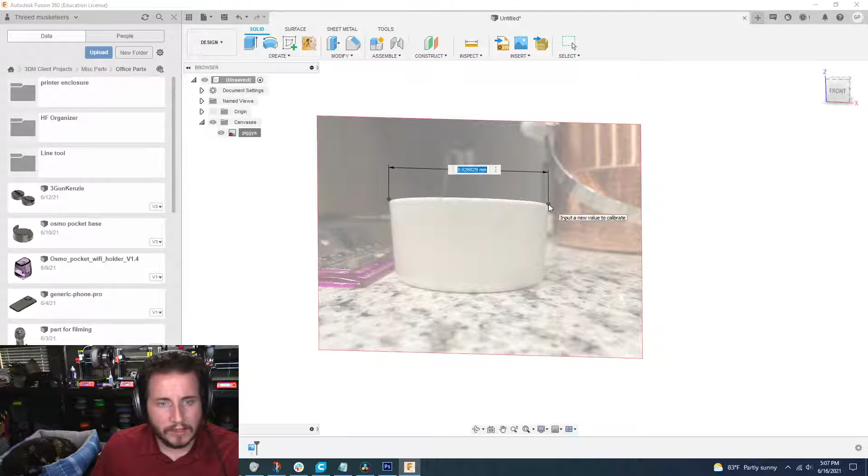We want to work from the front. That's fine, because what we're going to do is get it to the right size. So our canvas, we're going to calibrate the canvas because from this edge to this edge needs to be 3 inches. That's going to make the canvas quite a bit larger. Look on the front so we have it. Why does it feel like that's backwards? Because in the photo it looks like that. Whatever, it brings it in weirdly. But yeah, it's 3 inches across and it's 1 1/4 inches tall.

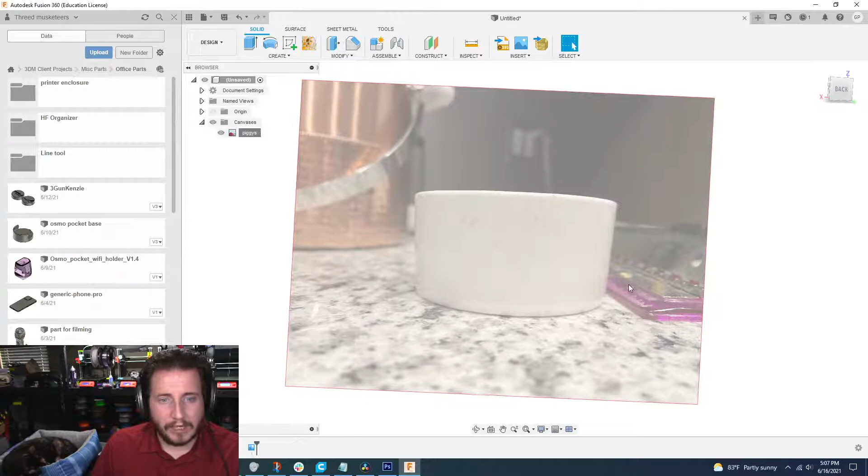So I'm going to also recalibrate it over that, so we know from here to here it is 1.25 inches. There we go.

Alright, so let's take a look at things here. We've got our sizing set. Now we just need to get it traced out, so let's go ahead and get this thing traced out. We're going to grab a... as we do this, we're going to grab a line tool.

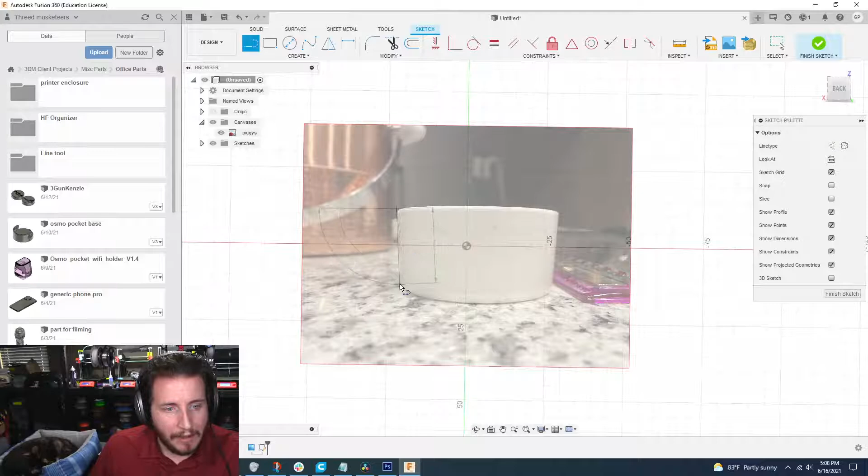We really only need to come to the middle, which that is not the middle, but it shouldn't matter because I can just do some measurements. So L X, we're going to do a line going straight up, and then as we do, we're going to do another one going straight out, and that's L and X to do it. X again to remove the construction.

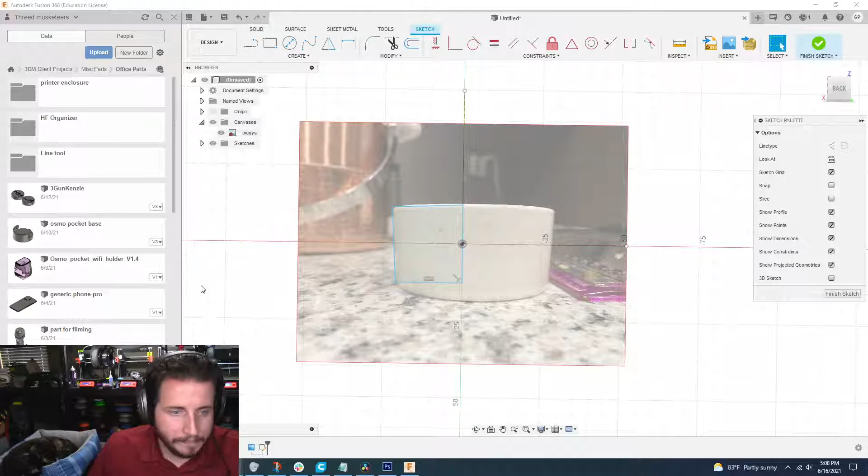Sorry, I'm off my game today, because I got a message that I really didn't expect to come in. It's just 3 inches wide, but it's 3 inches wide at the top, so let's kill that. This needs to be flat, so we'll just make it dead flat with the horizontal vertical command.

We're going to hit a dimension. This needs to be 1.5 inches wide, and it's going to make it a lot bigger. So we're going to make this collinear, which is this button up here. Collinear goes here and there.

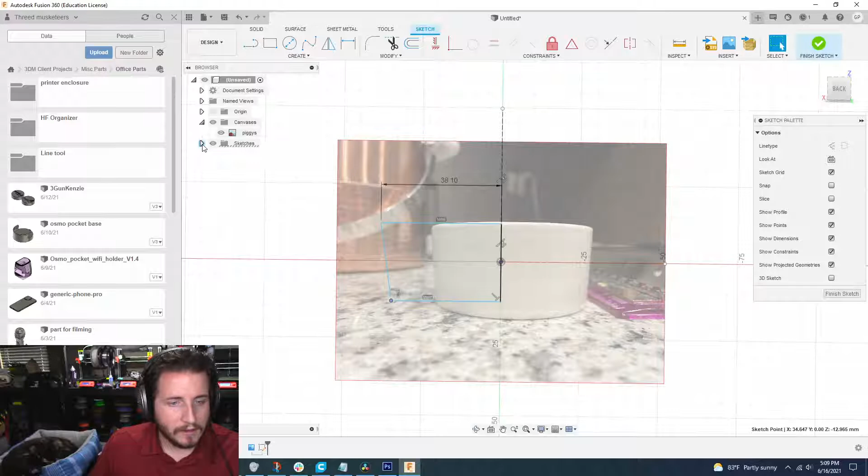We want the bottom. I need to reposition this canvas so it's kind of in the middle. Can we reposition it? Edit? It's not going to let us edit it? Okay, cool.

This photo was not taken dead on straight, so it does make it a little complicated for me, but I'm making it work.

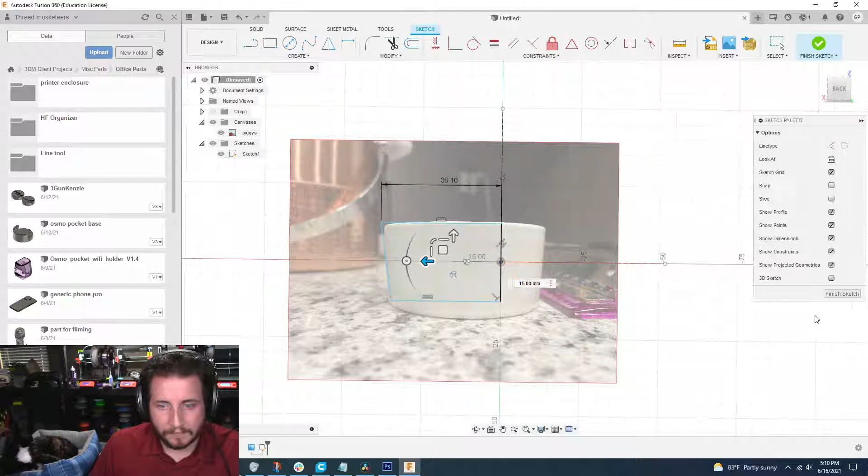Alright, so we know it's 3 inches wide, right? And we can take some guesstimates here about the angles. So let me hide the sketch real quick. Actually, no, let's leave that sketch up. I'm going to leave that where it is. No, let's move this back. I want to edit the canvas. I want to bring it as close to the middle as I can. That's about the middle. Yeah.

Okay, so why... yeah, 1.5 inches is 3 inches on the width. I wonder if she gave me the right number. Oh well, let's hope we did.

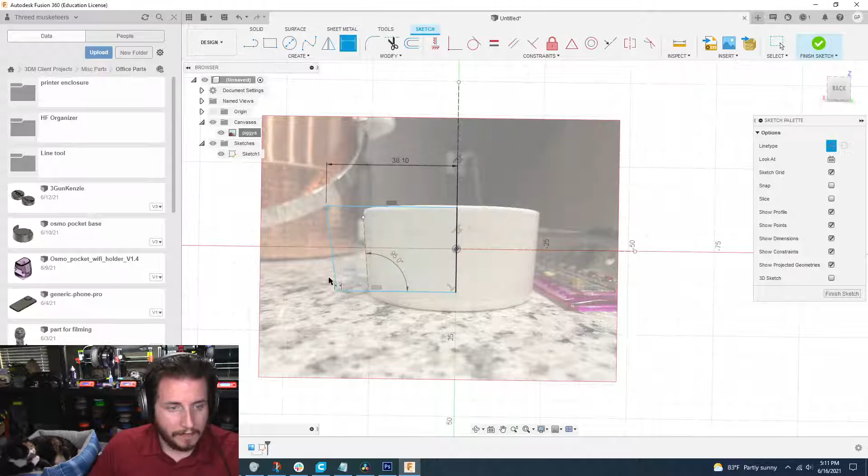Alright, so we can do some line work here. L and X so it won't bother anything. Come down to there. Oh, I guess that'll work. So I can go dimension here to here. It's a 94, probably do 95. 95 degrees, so that means this to this needs to be the same as that.

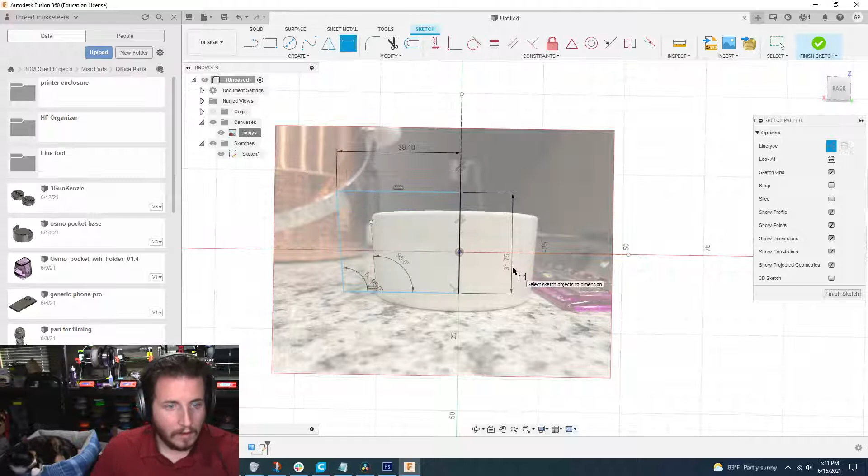We know that the thing is 1.25 inches tall, so we can dimension this here. That should give us kind of our look. Unfortunately, it's not vertically where we need it. There we go. Alright, so I'm going to dimension this from this bottom line here.

0.1 degrees? How is that off? I need these to be... interesting. Even though we've given it a perfectly level command, it's not.

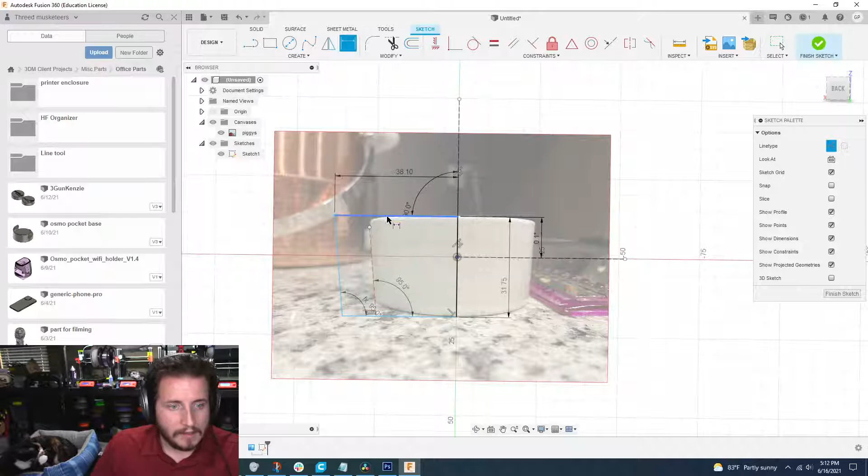So let's kill that. Let's get the dimension tool. Going to go to here. It's 90 degrees, which is exactly what we want. We want to figure out how far we are from here. Yeah, whatever, it's not going to give us the number that I'm looking for, but it is what it is.

Alright, well that's fine, what we're doing is not incredibly important for that piece anymore. We're going to go ahead and grab the Revolve tool. We're going to grab that profile. We have our center axis. We have it revolved. Now, visually, that's the bowl.

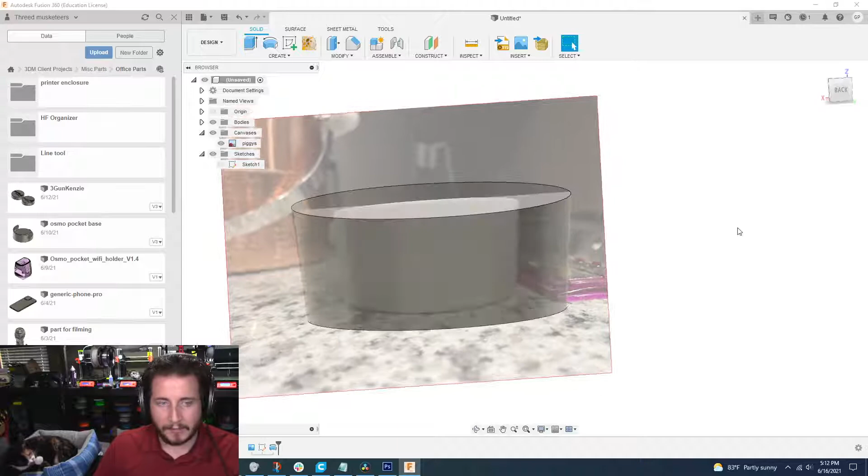Now, of course, with perspective, the bowl's going to be a little bit crazy, but that's why we get sizing, so we can go ahead and get rid of that now. What we're trying to do here is actually build something to keep the guinea pigs from knocking over the bowls, so we want to create a thing for it to sit into.

Whoop, drop something. God knows what that was. The cat will probably find it later on and let me know.

So we've got to make some more sketches. We're going to go back in actually to that first sketch, and we want to grab an arc. Probably a 3-point arc would be fine. Grab it from here.

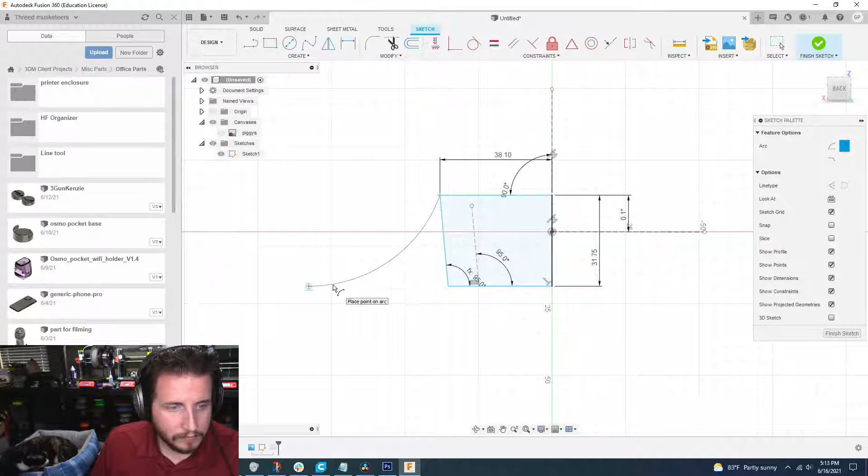Maybe down to there. Just like that, we're going to grab another line, go down to there. That is probably way excessive, but that is okay. We are going to revolve this around that. And we are not going to join, we're going to do a new body. So we have basically two separate bodies at the end of this.

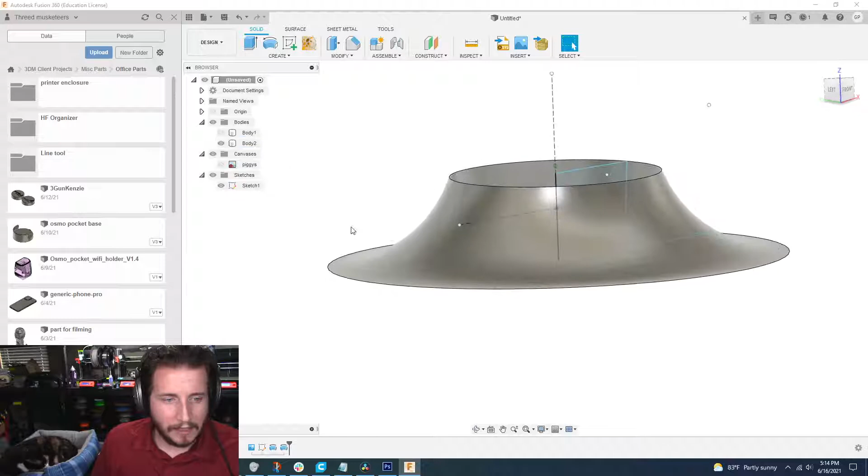So when we look at our bodies, we have our body 2 and our body 1. We're going to get rid of body 1 because it's not that big of a deal to us right now. We're going to use the press pull tool.

We're going to bring this edge in some. Can we go negative 0.5? Or are you not going to let me do that? You're not going to let me do that, because I'm guessing this comes all the way to basically a point. So let's look at just filleting this edge, see what that does.

Alright, so we've got an issue with our design. Our design comes to way too much of a point. So we're going to get rid of this, get rid of that, and look at rebuilding it.

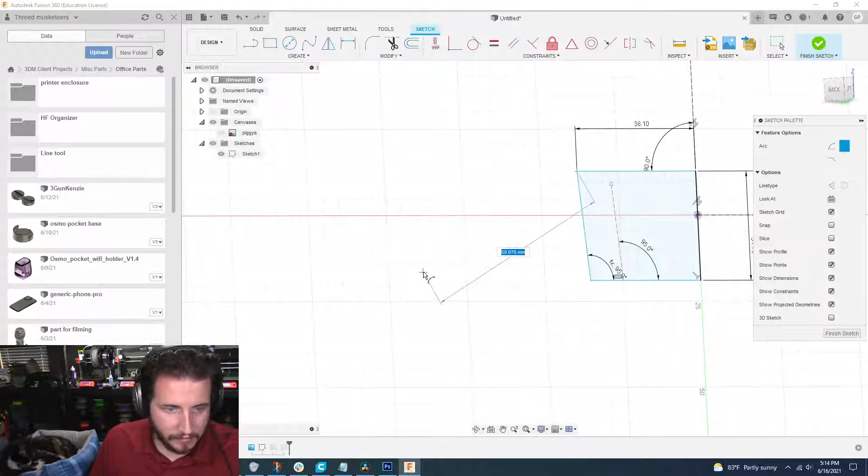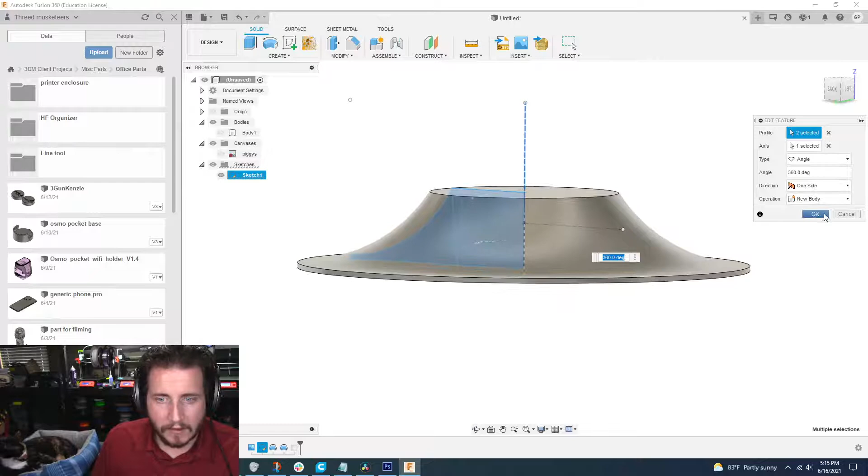So again, we're going to create an arc, a 3-point arc, and come down to, I don't know, there. Now we're going to do a line coming off this edge to there, to there. All right, now that's much better because now we can come in and press pull this edge to whatever kind of exterior diameter that feels good, right? This is more of a... oh, I see what happened here. There we go. New body, beautiful.

We can turn off the sketch.

And again, for those that are just joining, we are building a rim for a bowl for guinea pigs, to keep them from knocking over their bowls.

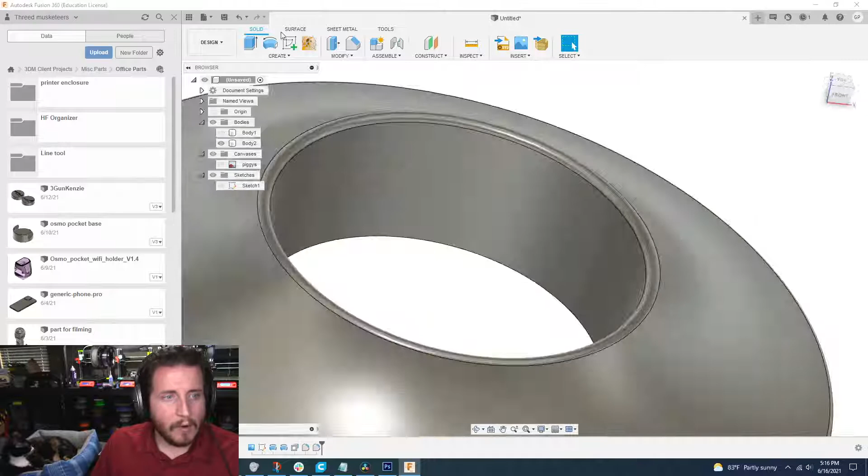What we're also going to do is come in here, not extrude, we're going to press pull this edge. We're going to go negative 0.25. That's going to give it some room so it can go in there. It's going to wiggle around a little bit, but this is going to make it a little bit easier because of food safety.

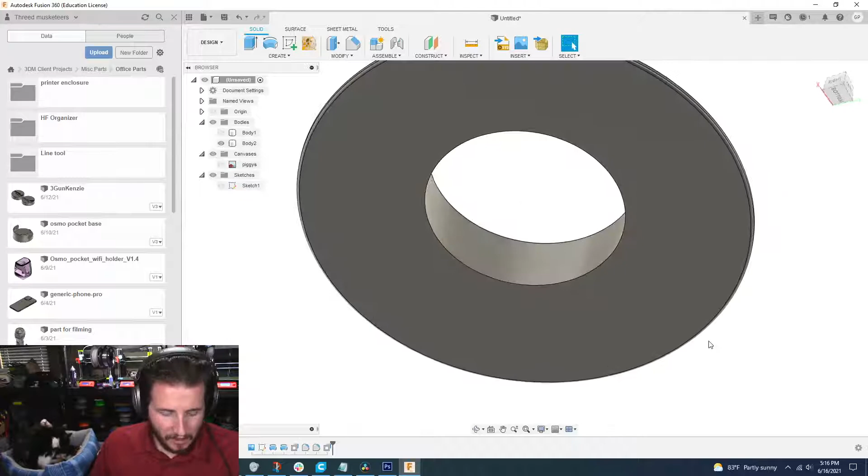So let's talk about food safety for a minute. Food safety is a big issue with 3D printing. People believe that you can just 3D print stuff that people can eat out of, that animals can eat out of, and it's perfectly fine. The answer is it's not. 3D printing under no circumstances, at least FDM, is not food safe, period.

And if you disagree with me, prove it. To have a food safe printer, you must have a machine that is all NSF certified. The material must be food safe, and PLA is generally food safe. But it must only print food safe stuff, and that is it. It cannot do anything other than food safe, because FDM material is inherently not very food safe in general. It has micro cracks and fissures and things that make it just a little bit problematic. And yeah, just don't eat out of it.

Don't, like, this is for a food bowl. It can be cleaned, it's no big deal. The piggies are not going to eat off of it, so you don't have too much to worry about there. But because this is going to be relatively cheap to produce, I'm not too worried.

And I'm looking, seeing the radius is 81 millimeters. That is way too big. We're going to bring that in with the press pull tool in some here.

That's probably fine. So the goal is to let them walk up without getting too messed up on it.

Let's grab this fillet that's right here and look at adjusting it. I think it's that first fillet. It is. Let's go to a 2 millimeter fillet. Meet in the middle, 1.5.

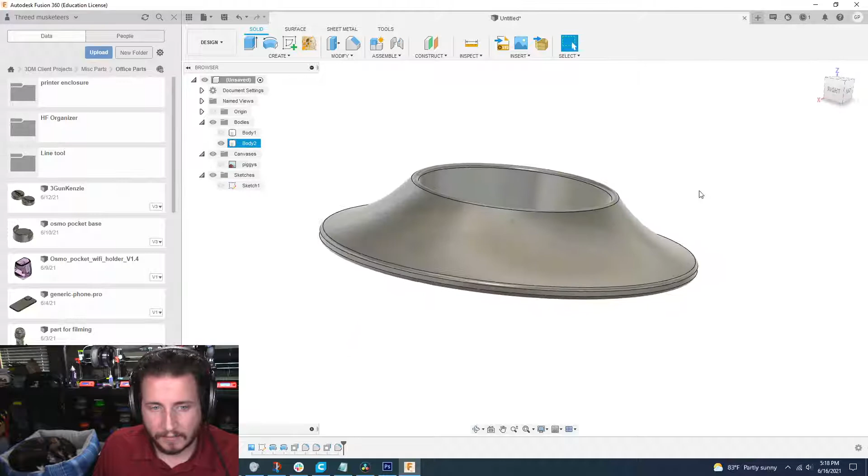Grant's going to have to do some hardcore designing tonight, unless one of our designers can take over, because we've got a client that needs parts, and I got to get them done. Part of owning a business is that when you don't... somebody's calling the business line. I'm sorry.

Give me just a second to let go of that. I thought that I turned off Google Chrome for noise. Oh, I can't because the music would turn off. Right, I gotta wait for them to stop calling the business line.

La la la la la. Waiting for people to stop calling the business line.

Okay, we're good. But yeah, part of the fun thing about being a business owner is if your staff are not W-2s, then they're 1099s. They just kind of get stuff done when they can, and then there are deadlines. And if deadlines are missed, guess who that falls upon? That falls upon me. Unfortunately, or fell upon me, that's the correct grammar.

And unfortunately, we didn't get the job done. So I'm going to learn tonight how to do it myself, and that means probably not a whole lot of sleep. I don't sleep much anyways, but I'll be working a lot later than normal. But hey, that's the way it goes. Part of the trials and tribulations of owning a business.

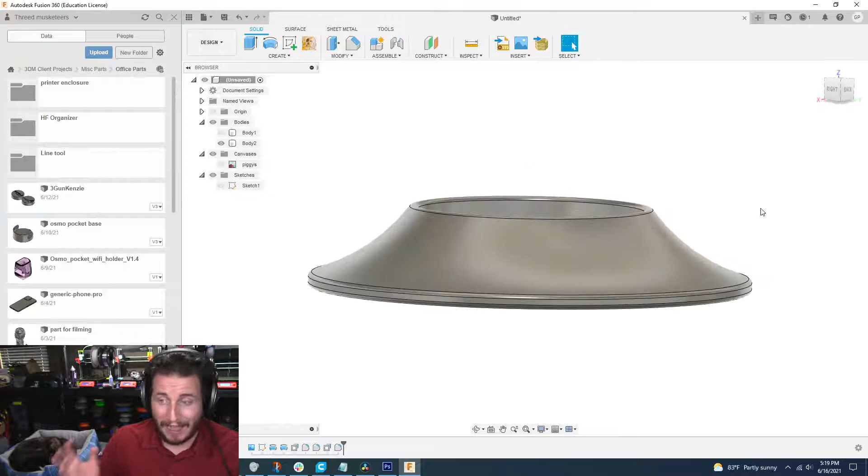I thought that it was in the works. I haven't heard from the designer, so my assumption is that it has not been updated, unfortunately. So we do what we got to do. As soon as this is over, I'm going to go work on a project for a client.

But anyways, I think it's really cool. This part is actually pretty simple, and we're almost done with it in less than a half hour.

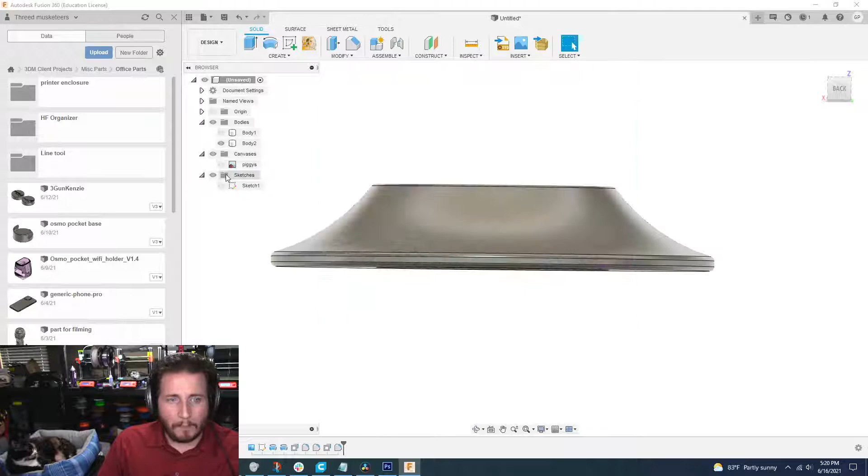Because this picture was not what I was expecting. Let's talk about it. So if you're going to design off a canvas, you need an image that is perfectly in line, because otherwise you deal with skewing. I had to take a guess as to what slope that is. The nice thing is, we're building this in such a way that it has a lot more slope than what it probably needs. So the bowl is going to fit in there, no big deal.

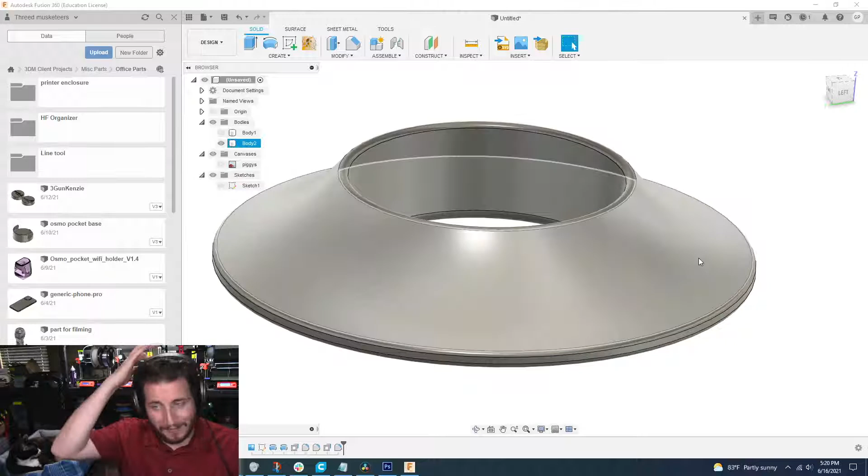They can use it as a slide if you make it bigger. They could use it as a slide. You know, that'd be funny if they did. If they do, and one of our team catches that, that'd be funny, and we'll put that on a YouTube thing. What do we call that now? The community tab? I don't like this song.

We're going to another song. The community tab. That's right, the community tab.

Boy, you are just tired, aren't you, Miss Victoria? Can I get a like for petting the cat on a live stream? I know, you just want to be left alone all the time. I know, you're just like your dad. Just want to be left alone all the time.

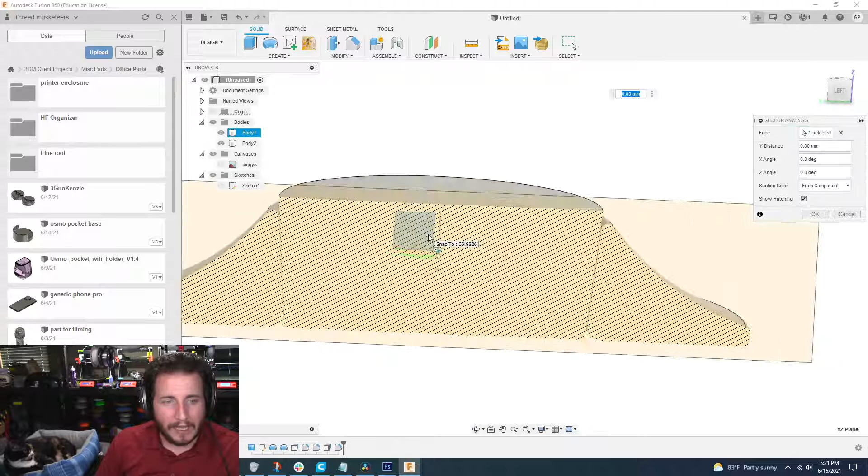Anyways, let's take a look at this a little bit further. So we have our regular body, and I want to see the interface. Now I can come down here and kind of see it, but it's a bit of a pain in the ass. So to do that, we're going to use the Inspect Section Analysis tool, and pull from one of the edges. We can now see that between here and there, we have a quarter millimeter. That should be enough, because that's half a millimeter all the way around. Should give us enough wiggle room to make things function the way that we'd want. And again, this isn't too obtrusive, right? It's not really going to get in the way.

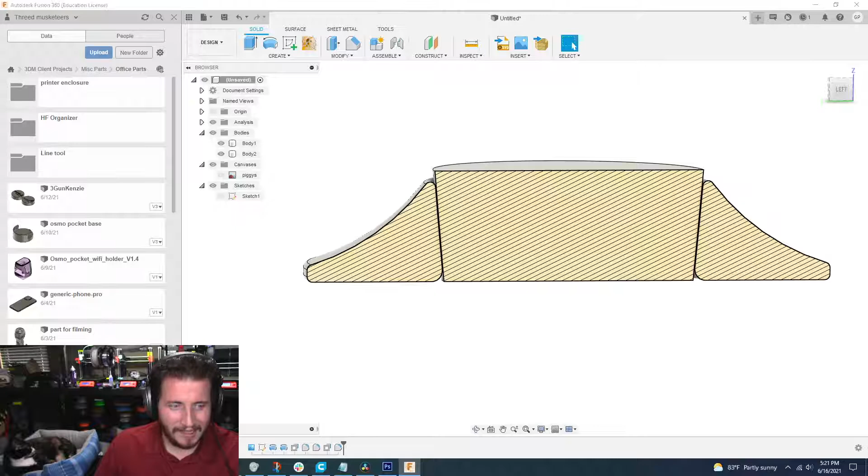And you know what, we'll go on Prusa Slicer too, and we'll show it inside Prusa Slicer. By the way, Prusa Slicer likely got a big update today. I haven't looked at Prusa Slicer today, but we know Prusa got a big update for their machines today, so it's likely, yep, configuration update. Cool, they got a carbon fiber PC blend for the Mini, but we are going to go to, definitely not that, we're going to go to the MK3S, and a little auto update as we're going.

Alright, so we've got this part. I'm thinking, though, that I want to make this a little—well, you don't want it too steep because then they're going to get stuck, right? And I don't want it too shallow in that they're not going to really be able to function. So this should allow them to move.

I should have asked—this is all about asking the right questions as well, and I should have asked the question from the front of their front paws to the front of their nose. That way they can eat, they can drink without having to crawl up on this. And all this really serves as is a way to keep the bowl from flipping over, because that's what this should do, right? We've brought the bowl now to 150 millimeters in diameter.

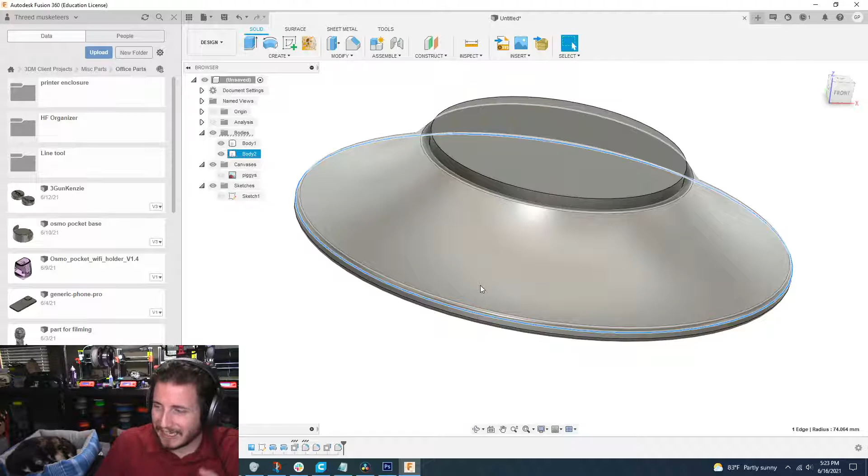So about 6 inches in diameter, and that's going to keep it from reasonably being knocked over. Again, for those just joining us, we are making a bowl that won't tip over for guinea pigs.

Now, I could make the bottom completely solid and actually turn this into a real bowl, but I think it's better if she uses the ceramic bowl she has and puts it in there, which will allow it to be hand cleaned. So as far as I'm concerned, this is the right way. Let me know in the comments what you guys think.

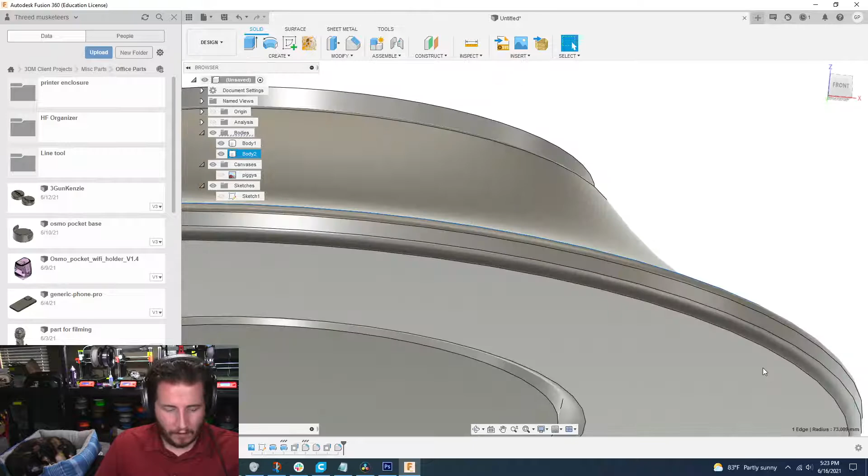We have a lip here. Let's see how tall the lip is. The lip's 5 millimeters tall. Allison's right, she says she thinks it's a trial and error situation. She's absolutely right, we gotta see what the pigs are willing to do versus what they're not willing to do.

This probably needs to come down to that. Let's see how that looks. So now that brings us to about 3.5, that's a little bit better. And yeah, this is where if you had the 3D printer, you could make this happen, right? This would be a lot easier if you had your own machine.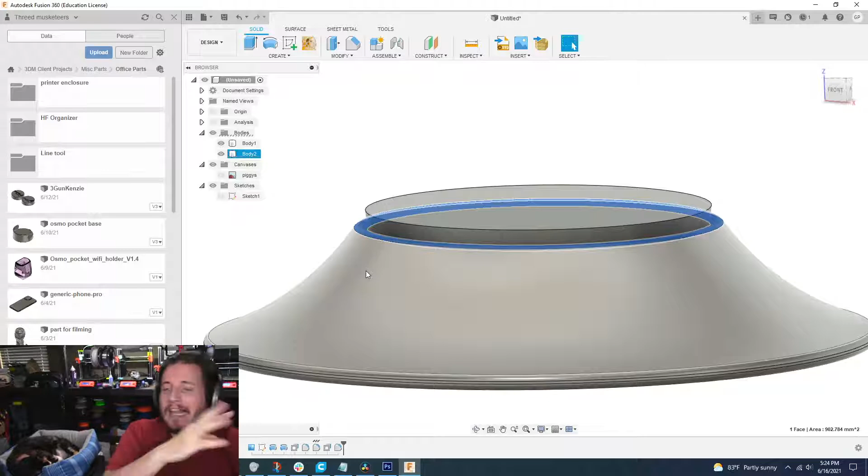And yeah, making things happen. So I've got fillets everywhere. I'm just trying to look to see where, because like most animals, they're going to find ways to hurt themselves if they can. I think I would probably not make it so high up on the bowl. My thought to make it high up is that I want to encompass at least 50% of the bowl so that when they hit it, it doesn't flop the whole thing over. I want enough of the bowl really being attached, but that is a good point.

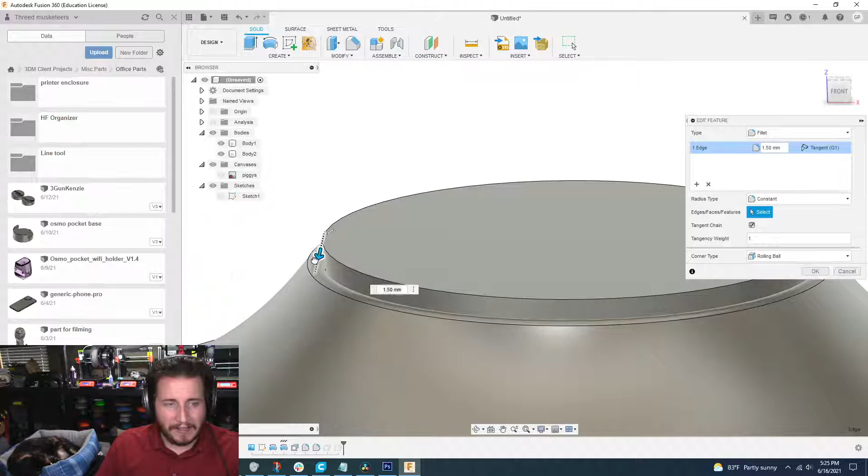So there are two different ways we can handle this. We can come back into the sketch and just modify where this starts and stops, or the way I'm going to do it, we can just modify this fillet. Because as we increase this fillet, it's going to bring it further and further down and only make this more and more round. Now, of course, we've got that little issue of if they're a little messy, you might get some buildup along this inside edge.

But is it a big deal? That's really what matters, is it a big deal? I don't think it is. I think this thing's going to have to get cleaned pretty often anyways, so I think that's more than adequate. Yeah, I think that's perfect, it works out kind of exactly what we needed. I figured this one was going to be short, but I didn't realize it was going to be this short.

So yeah, let's see here. I should ask—also, I gotta take a picture of this cat. Hi, Miss Kitty, we'll use that as our community post for everybody.

I need to ask the client, let's ask them what the names of the pigs are.

I guess you just have their feet on the floor, but they would have their feet higher with this design maybe, which I don't think is necessarily a bad idea.

And the reason for that—one of the kids I am watching at work with says hi. Hi kid at work, I don't know your name. How are you? I hope you're having a swell day.

You know, we're going to do the names of the pigs, and that one's going to be a fun one because I always struggle with putting names on curved surfaces.

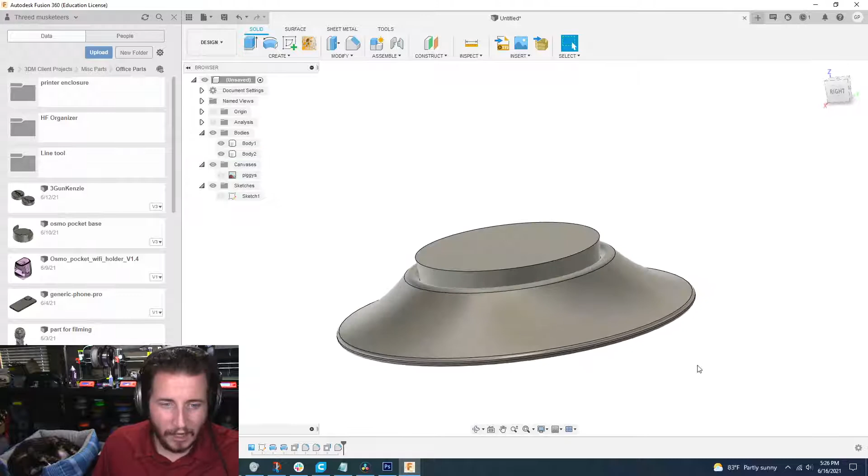Oh, you know what? No, we're not going to do this. I was going to do it, I was going to emboss the names here, but oh my god, it's going to get so dirty. So let's put it on the bottom.

So let's do a sketch right on the bottom there. We're going to project that.

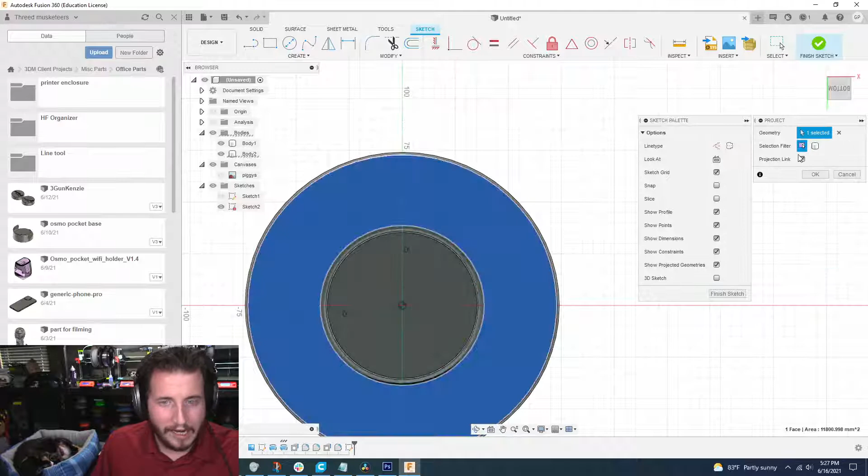And Prusa released a new printer today, the SL1S. I am so amped. As soon as we're done with this design, we're going to go take a look at it. We do have a video coming out tomorrow on it, but I'm amped and I want to talk about it on live with people to see what you guys think, because I think it's pretty cool.

So let's grab the text tool. I want text along a curved surface. There we go. And so we have the names of the piggies—they are Vinnie and Mozart.

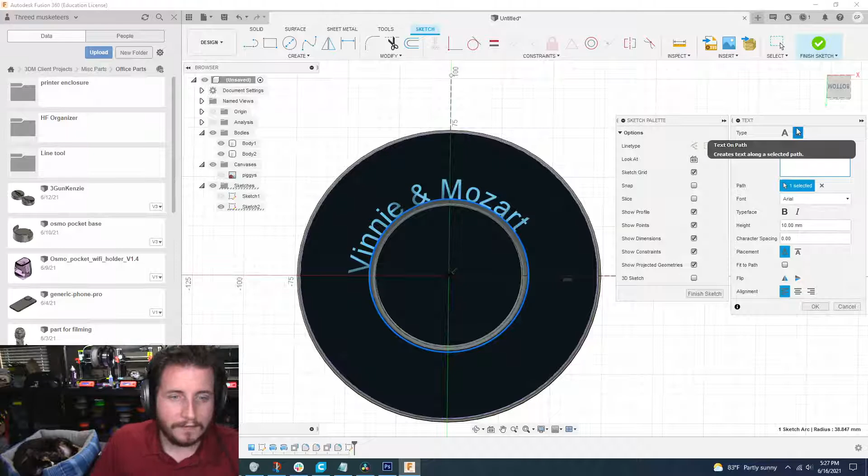So we have Vinnie - let's do an ampersand. Vinnie and Mozart, for Vincent van Gogh. There's potential for catching feet if it was on the side too, which could work toward our benefit, giving them something easier to grab onto, but it's not necessary. I think if we just put it on the bottom, it's more than adequate.

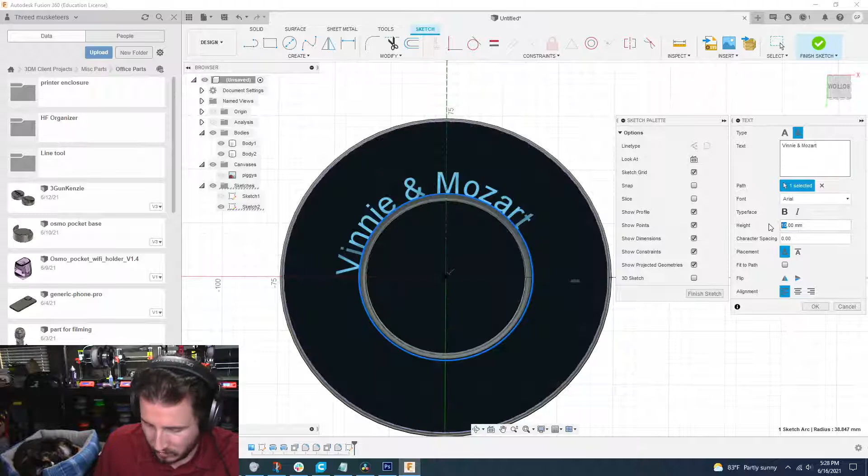So we're going to increase this height to 20. Oh cool, I can do text below. Let's do this as the outside path. We'll do text below - oh no, I don't like that, that was so bad. Let's go back to the way it was.

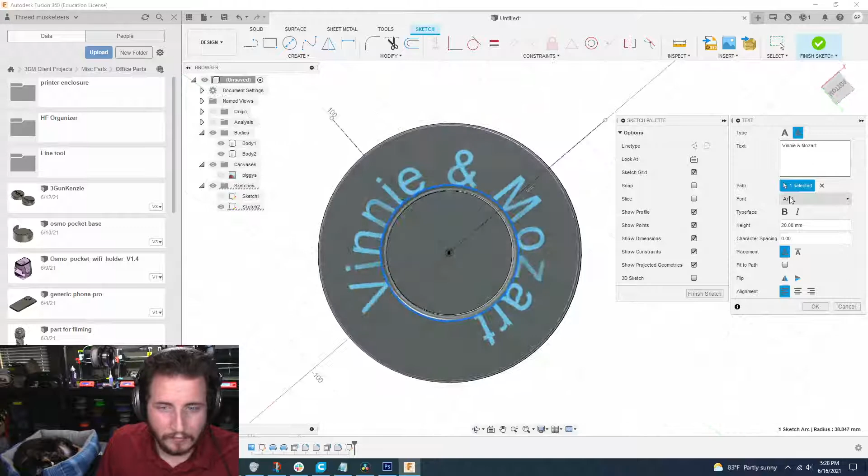Alright, so we've got their names on the bottom. We can look at going maybe to 25. What I'd like it to be is - could I do it with another ampersand, like the Vinnie and Mozart thing? Let's try that. Can I do 25? Nope, 22. Oh, that's so perfect! That's what I'm doing, love it.

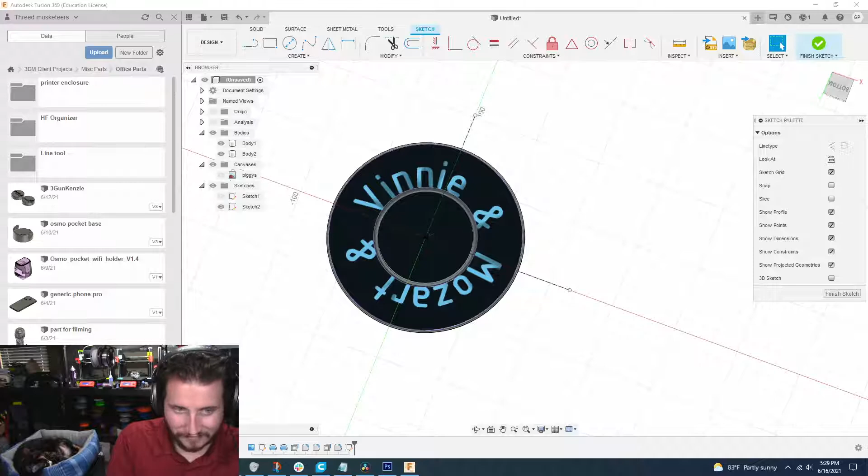Freaking love it. Which one is which? Damn it, I don't know. Which is which? I have no clue, and I should have asked that when I asked about this. Let's see, you know what?

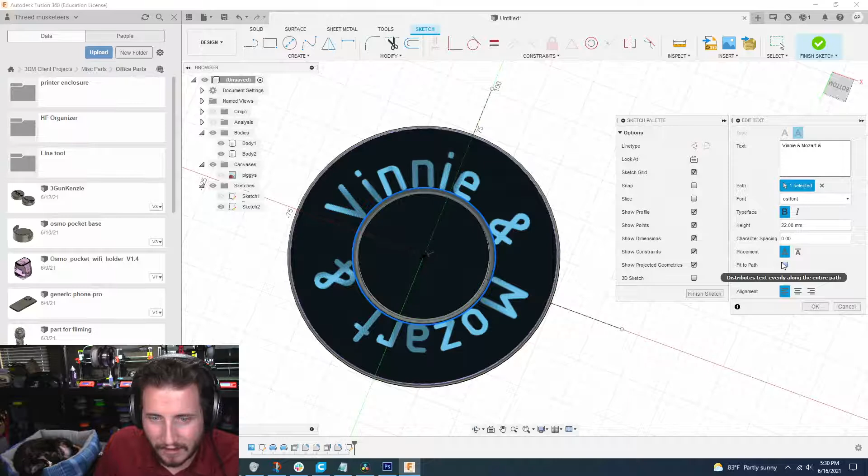This should be okay, but normally I would want them to be a little bit separated from the path. Oh, I could have just done that - could have just done fit to path and separated everything.

Mozart is the gray and white one, and Vinnie is the white one. Okay, so Mozart's got the mohawk - Mohawk Mozart. So I'm told this is Mozart, and this one is Vinnie, from what I'm told. That data might be wrong, but I'm gonna go with it. Yep, Vinnie Mozart, there we go. Vinnie is the fatty and tips over his food bowl constantly. Well Vinnie, this one is for you - it's also for Mozart, but it's also for you!

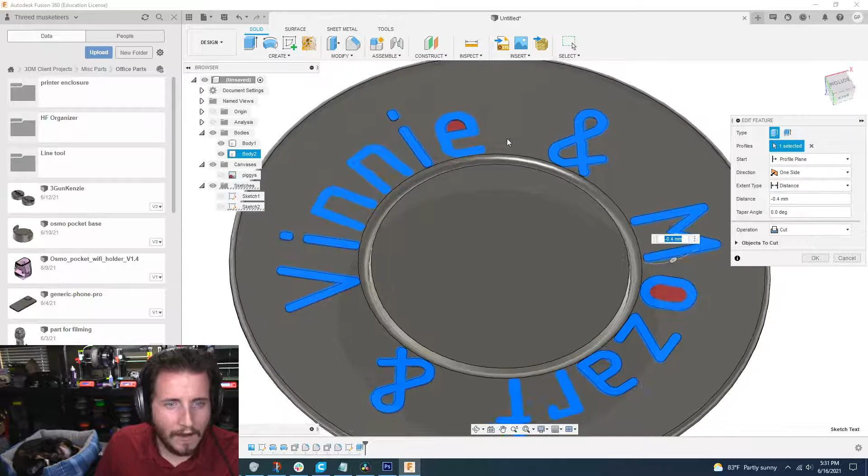Alright, we're gonna extrude these downwards maybe, I don't know, 0.4 should be fine. There we go - oh no, Grant, you messed up, go back to that. Oh I see, some of your... this is a problem with using Oxford. I don't have Oxford for CAD, so alright, we'll just go back up to Arial, because Arial's boring but it works.

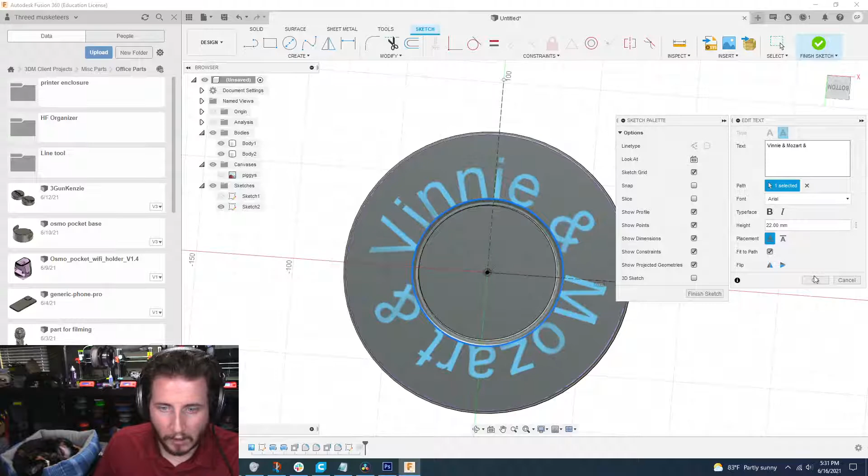Arial's boring but it works. We won't bold them either. Alright, that should work. And yes, Vinnie stands for Vincent van Gogh - the guinea pigs are named after artists, Mozart and Vincent van Gogh. So there you go, you're learning things about our team.

Naughty Vinnie, Allison says, yes. Victoria, do you knock over your food bowls? Victoria does, and a fun little personal aside - Victoria, since she is a queen, used to actually have crystal bowls. I found some beautiful crystal bowls at a local thrift store, and that's what I made for her food dishes for many years, because I thought it was hilarious. Now she has anti-tip bowls.

We've actually elevated them on spools, so especially for animals like cats and dogs, you can elevate their food bowls. It helps them not bend down as much to get their sustenance. So yeah, I was gonna get it, but I totally forgot.

And then this one came in here, and we've just been hanging out, right? We've been hanging out, haven't we? Like a good little kitty. Go ahead, try me, try me. I'm faster than you.

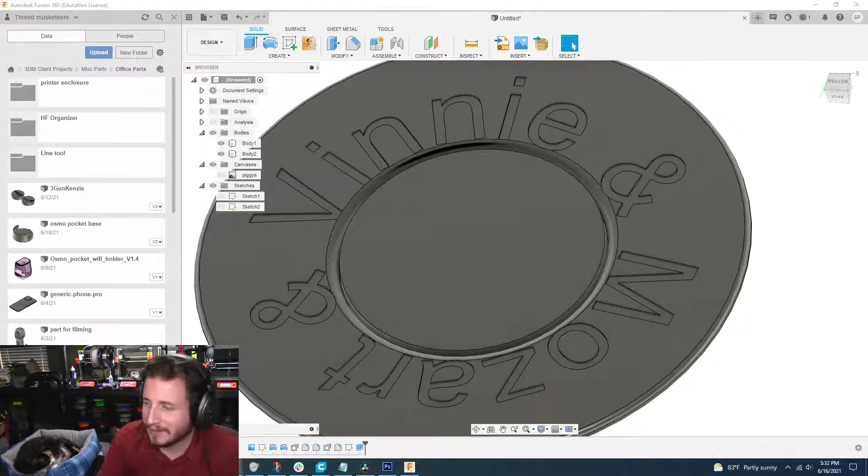Anyways, we got this done. This is going to be a pretty easy piece to print as well. Let's go ahead and save it. I'm going to name it the Piggie Bowl.

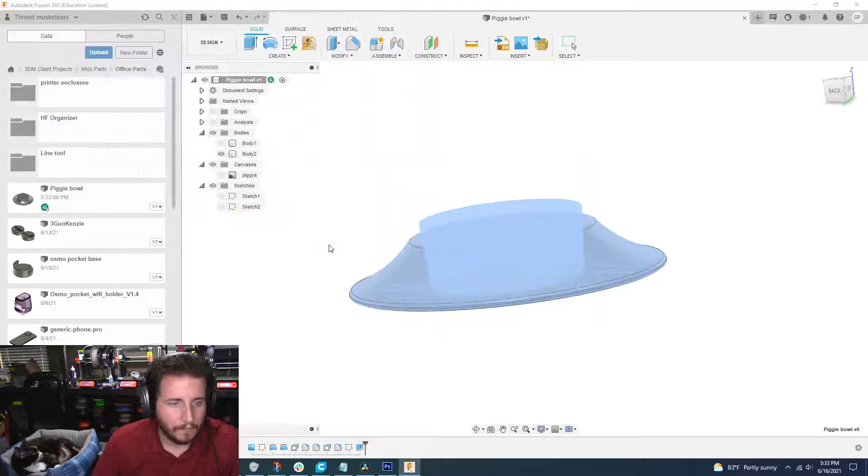We're going to go ahead and remove that first body. We're going to download it here, save as STL. Alright, let's grab Prusa Slicer. Have you figured your things out? You have, beautiful - Piggie Bowl.

Boy, that's big. Okay, so we're going to change a few things here - 2 is good there, infill is going to be gyroid.

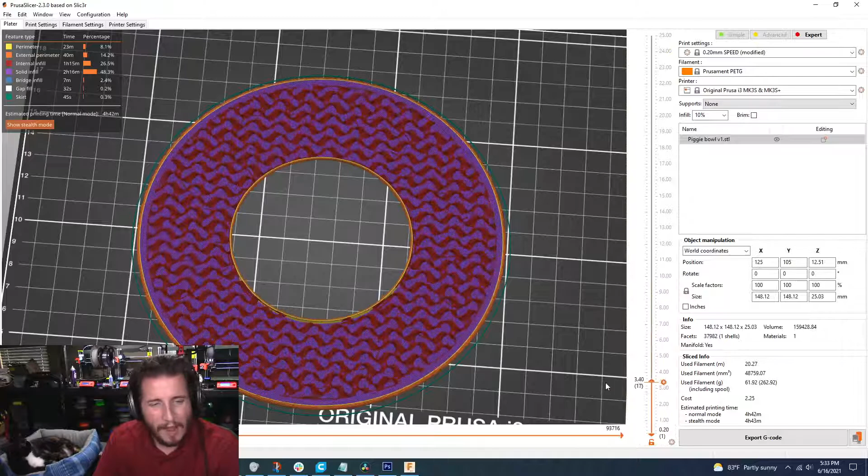This bowl is going to weigh 62 grams. I don't know about the color - I will have to talk to the staff member to get the color. But yeah, that's really it.

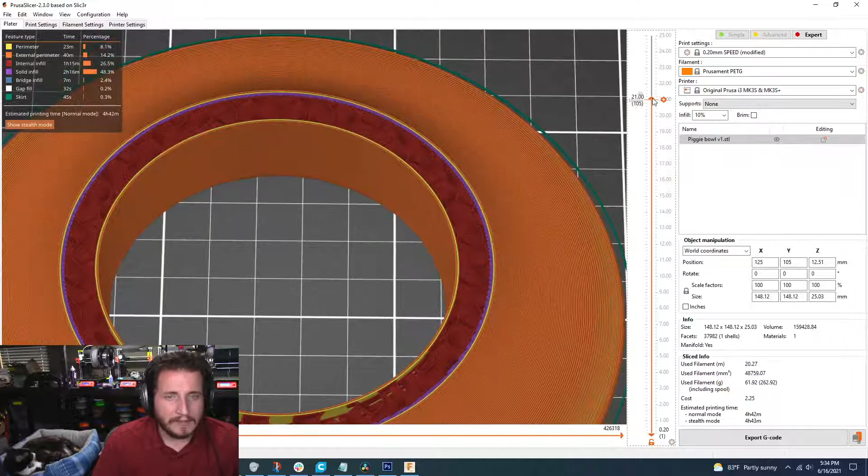We're going to print it like this because any other way would be wrong. It looks like about a 4-hour print, so this would make for a pretty decent time lapse. Maybe we'll do this for the next time lapse Tuesday, since time lapse Thursday is already done.

It's done. Allison says dark color. I don't know, I'll leave it up to the staff member who wants the part for what color, but me, I'd go with Prusa orange or bright yellow. I wouldn't do dark colors. I'm all about life being crazy bright neon.

Anyways, yeah, this one... you know what we could do? We could take a look at, I didn't mention this in the Prusa video, the variable layer height. We're going to do some specific videos about specific features because I think it makes more sense rather than burying it.

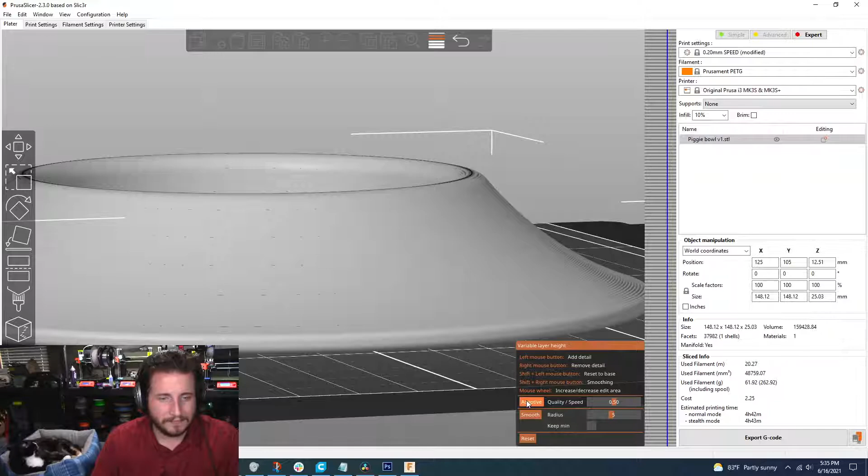This is Prusa Slicer's adaptive layer height, this is kind of cool. So what it does is adjust the layer height based on what it sees. If we look under printer settings, we'll see that the machine limits on extruder 1 are 0.07 to 0.25. Good Lord, have mercy, this print's gonna suck.

That's okay. Hey Peter, how you doing? Red/Ace is hanging out with us.

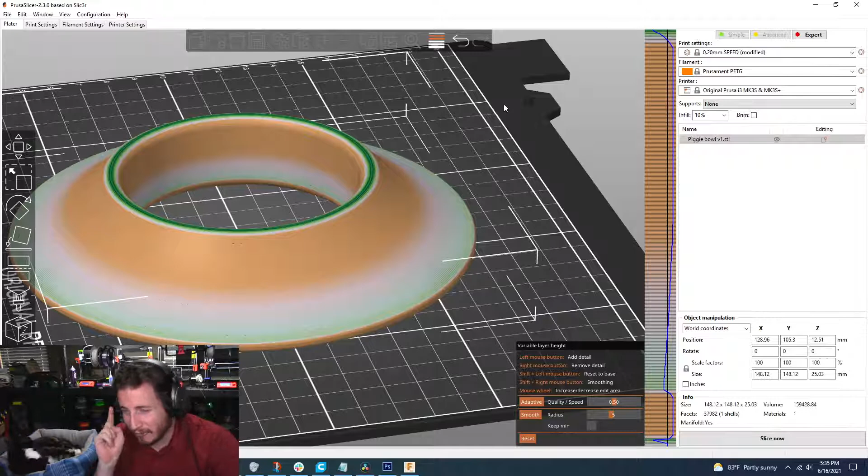We can also smooth it out, which will really make those transitions a lot cleaner. So if we now go to slice, you'll see that before it was 4 hours and 42 minutes. It's going to likely be quite a bit longer now, but let's see what it's actually at. Wow, it's less time, I wouldn't have guessed that.

Maybe we'll play this for fun. Yeah, there you go, nice and simple part.

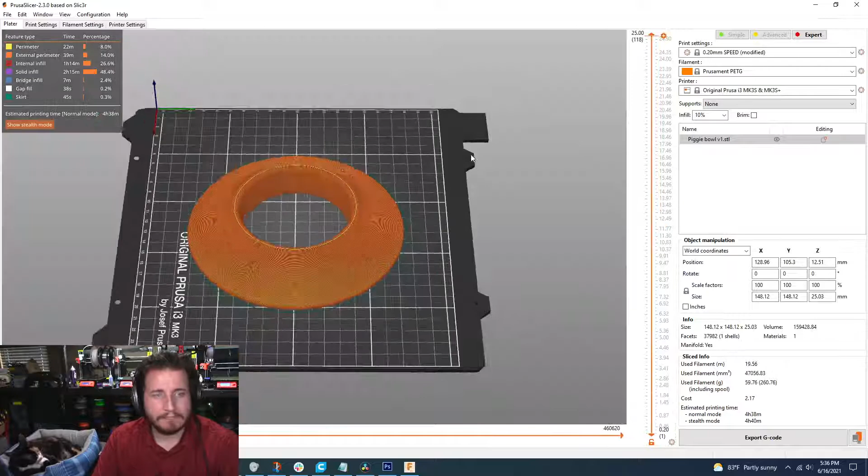But let's talk about something. Let's talk about something today. Yeah man, hey, I know you just joined us, I'll show you real quick.

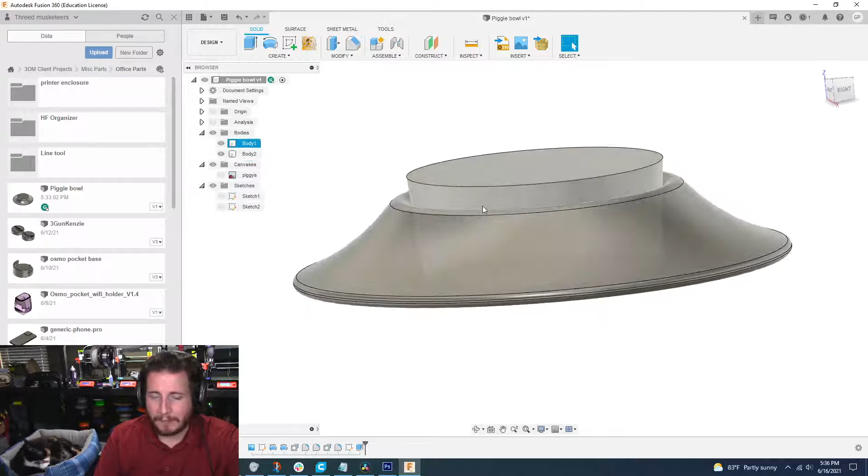We did a bowl to hold a food bowl for a guinea pig. The idea is that you put the food bowl in here and the guinea pigs won't knock anything over because it's a nice smooth ramp and the bowl is held inside of it. So if the guinea pig can move something 6 inches and flip it upside down, we've got many other issues to worry about.

But guys, the Prusa SL1S is here! They're calling it the SL1S Speed, which I don't know, I want to call it the Speed Enhanced version. S means speed. Again, we're going to have a whole video coming out on this tomorrow, but I wanted to point some things out because, honestly, there are some really cool things.

Also, a staff member sent this to me, and this has got to be the cutest little 3D print I've ever seen. Look at this, it's KeyClappie, the print-your-own Key Cappy clone. I love it, he holds a little mechanical key switch, and I love him. If I had random mechanical key switches laying around, we would do that.

But anyways, SL1S, so here's the deal, right? The SL... oh, are you excited too? Okay, alright, well Cat's going. Where are you going? Huh? What's your plan, what you doing? Who you with? What you do? Where you come from? Hey, come here. Well, she's going to be over there and being a pain.

But the SL1S is roughly the size of an Elegoo Mars, and I talk about this in the video, so make sure you guys check out that video tomorrow when it comes out. But the SL1S is expensive.

It's 2,000 US dollars. Nope, there goes the cat, goodbye. And then the CW1 is 750, but together they're 2,600 bucks. Here's the deal, right, it's the size of an Elegoo Mars, 127 by 80 by 150. So it's a little bit bigger in the Y-axis, and it's 10 times the price.

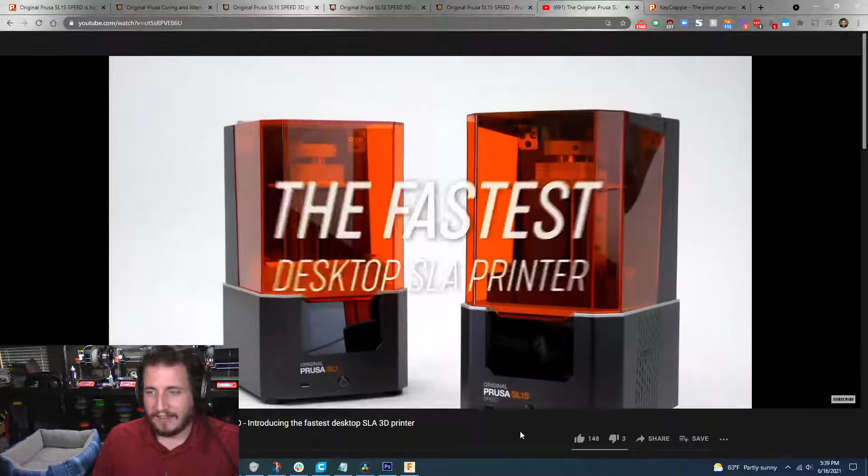Look at this, man, this is just too cool. I'm turning up the volume so you guys can hear it too. Turn it down so it's not too blazing. Also, whoever their editor is, it's Mikolas. Mikolas is their editor, and you did a damn good job. Look at this thing, this thing is amazing. And they're right, it is the fastest. Layer times are stupid crazy fast.

Mono screens are nothing new in the industry, but if you notice, there's a ball screw. I love it, I love it, I love it. And something they didn't talk about, but I think I picked up on and I show it in our video, that appears to be cooling fans, cooling ducts. And if we go back a little bit, as soon as they remove that screen, you can see there might be another duct right there. I think they're actively cooling the LCD matrix.

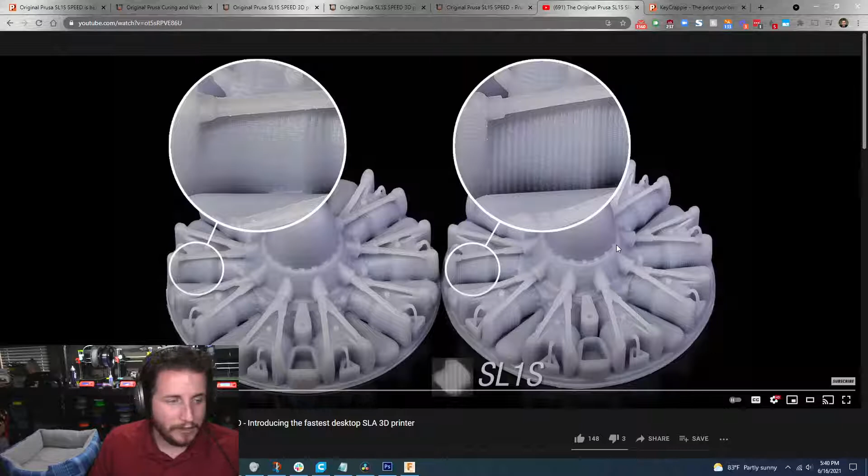Allison says she's got to head off to bed. Hopefully you get the work finished with little to no problems. I'll catch up on this tomorrow. Have a good night, Allison. We wish you the best, and yeah, sweet dreams, I guess. Is that what you tell people online? That just seems weird, have a good night.

But yeah, look at this. So alright, let's talk about the resin tilting tank. I know I didn't talk too much about this. Do I have a build plate laying around that I can grab easily? No, damn. Alright, we're going to use the patented Grant build plate.

And so for resin, let's bring up Big Grant real quick. So for resin, normally you have your vat. Oh, I have a vat, I can bring the vat down. Oh God, what did I hit? Well, something moved. So normally your build plate goes into your vat. I'm not going to stick my hand in there because that's going to make a problem. But normally the build plate goes in the vat and just pulls out, right?

And you've got massive peel forces because there's a lot of surface area here. Oh hey, look at that, what a great little sound. So you have to pull this all out evenly and together. And that's a problem because it's a lot of force to pull it out. And what can happen is your part can actually get elongated in the Z-axis.

And so Prusa has done this, and it's nothing new. The Formlabs Form 1 Plus did this, but the vat tilts down as you raise it. So you can raise a lot faster because it's combined, helping you remove that peel force. So let's get rid of Big Grant, let's keep watching the video.

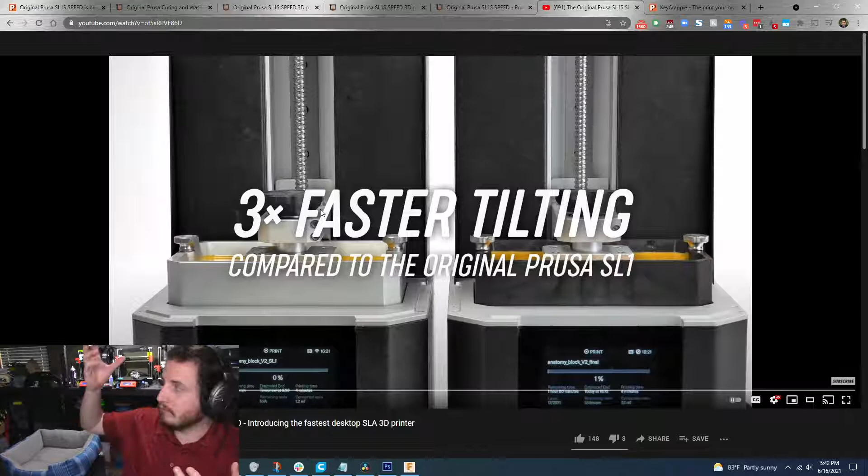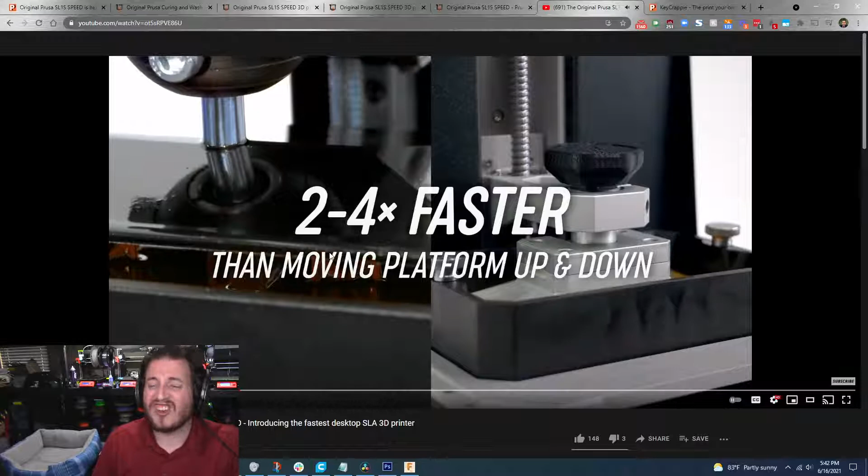Prevents layers and stirs the resin. That's true. So for any of you out there that want to play with mica powder or coloring your resin's pigments that can settle out of solution, a faster tilting tank will enable this. Now, printers like the Mars, the Saturn, they don't mix anything, there is no mixing involved in that. Now the Formlabs Form 3 does, but I don't know. They have moved the tilt. The tilt was like 5.8 seconds down to 3, which is nuts. Which enables them to move the build plate up and down faster, which is really cool.

They are considerably faster, like considerably faster. And they're saying with clear resin and draft mode at 0.1 millimeter layers, you can do the entire build volume in 2 hours. And the cool thing about SLA and MSLA is that it exposes the entire... well, MSLA, SLA doesn't do that, but MSLA and DLP technology expose the entire layer at once. So the only thing that really matters with your build volume and your time is your Z height.

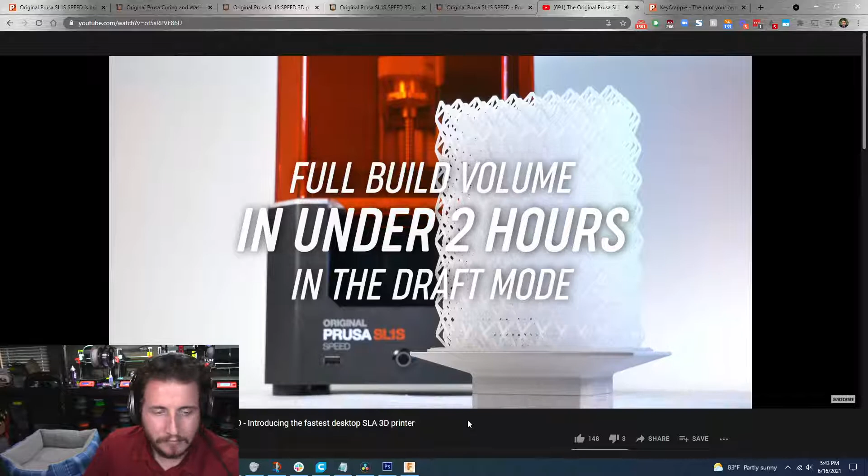I love it. I mean, it's expensive, don't get me wrong. Also, they stack. I point this out in the video too, but oh my God, resin tanks that don't stack are the worst thing ever, and these cheap ones don't stack like that.

Wonder what speed is compared to the Carbon 3D clip. I promise you, it is very slow compared to Carbon. Carbon 3D has a technology called clip, which uses a film that is oxygen permeable, and that permeability allows it to print incredibly quickly and consistently. It doesn't pull out then come back, it just pulls the part out. The Carbon 3D process is absolutely ridiculous, but Carbon is not desktop level, it's professional level, to the point where you can't buy one of their printers. You can rent them, and yes, the materials are proprietary.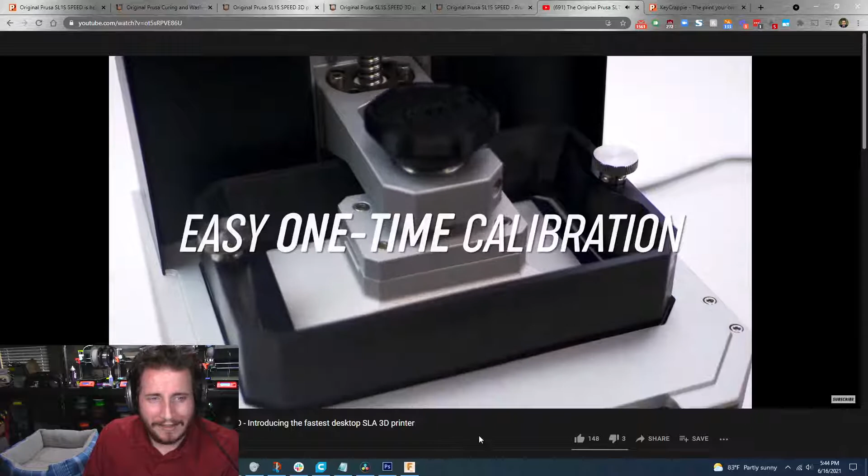So yeah, the one-time calibration is great. I think this is great for people that have businesses that don't want to calibrate their printers all the time. Resin tank with FEP film, that's pretty standard, easy and cheap replacement. Yeah, which they don't mention here, but it's a $25 resin tank with film. That is dirt cheap, dirt cheap.

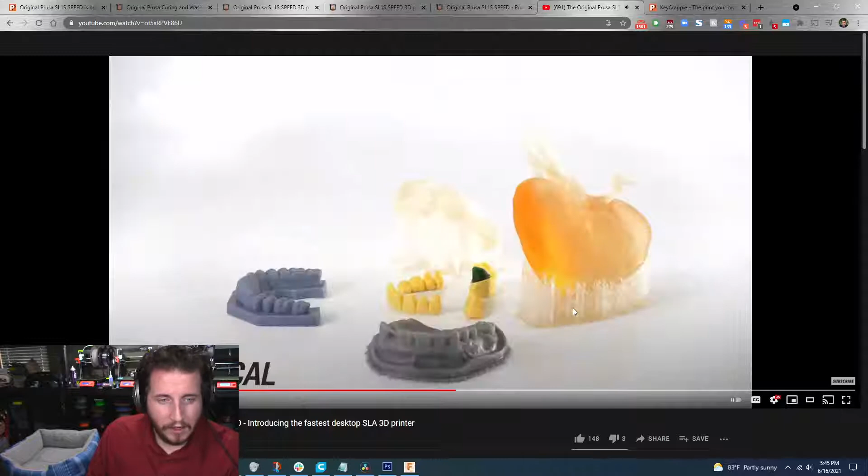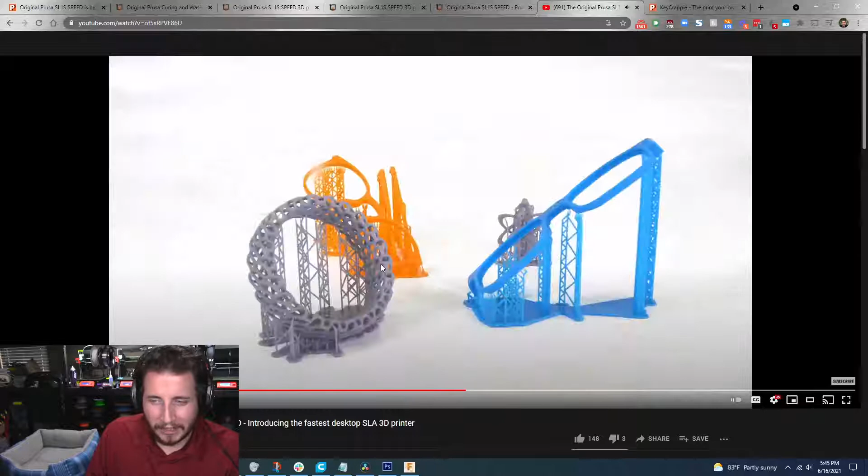Gorgeous parts here, and I think they've clearly done something with dyeing here, and I don't know what it is, but we've got really dark, and then it's light in the middle. So I don't know, these parts are just gorgeous. I haven't seen resin parts this nice outside of like EnvisionTEC, and that's something, because EnvisionTEC printers start at like $10,000.

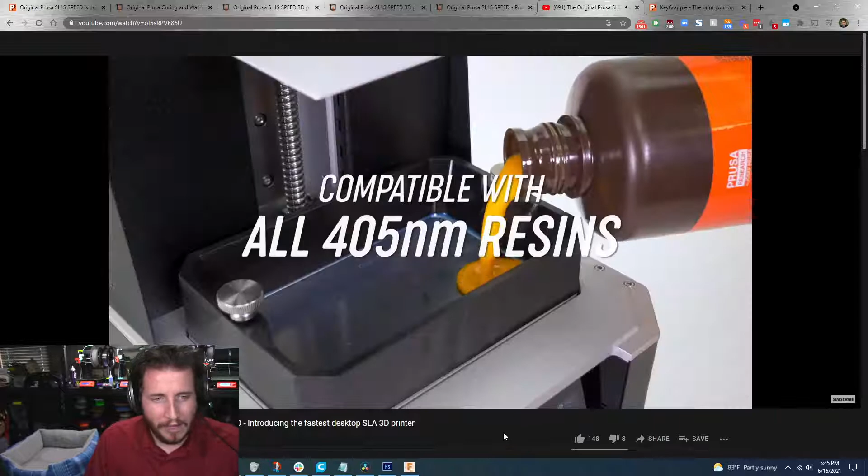Or $15,000. Their touchscreen is beautiful, just look at that touchscreen, man, what a beautiful touchscreen. They did all their uniform measurements to make sure it works with all resins, which is nice, all 405 nanometer resins. So you don't have to use Prusa resins, but as you guys can see, there are lots of resins it works with, of course.

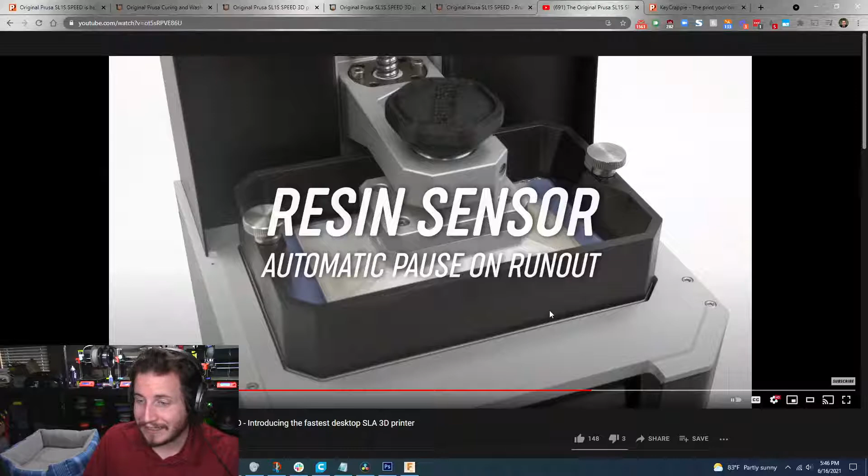And by the way, this to me is the biggest thing that they've done, a resin sensor that pauses the print on runout. I have lost a couple of pretty substantial prints because I didn't have enough resin. This, to me, makes it worth every dime.

Now, unfortunately, because Prusa machines are... let me talk about the space-saving thing too. Prusa machines are open source, which means we're going to see this on some of the cheaper machines coming soon, but I still think you've got to support Prusa. This was one of my biggest complaints about the Mars and the Saturn, that you have to lift the whole damn top off the printer.

And that's a problem if you want to stack them on shelves, right? Because the shelf has to be really, really tall so that you can lift it up and pull it away. With this, the whole front just hinges up. You can glue a magnet to it and stick it to the shelf above you. You can still work on the printer, and that is so much easier, right? All my resin has to be on the top shelf now, and I don't like that.

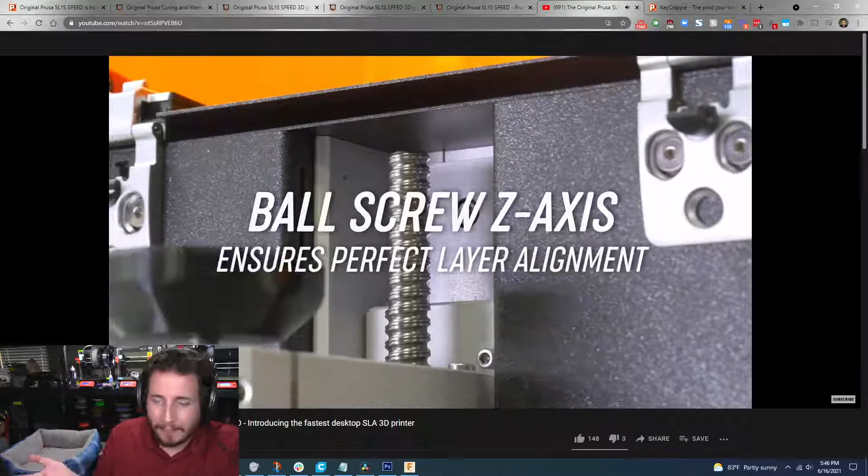Ball screws, come on, ball screws are the best. Built-in carbon filter, which is great for some of those engineering resins that can be really, really stinky. Of course, Prusa Slicer, it is amazing.

We have not done Prusa Slicer for resin. We will do that, but we're going to do a whole series on just a couple of resin technologies that are out there. I figure that made the most sense rather than trying to muddy the water saying this can also do resin, to do resin specifically on its own.

I'm not a huge fan of web interfaces, but that one looks pretty good. Of course, their big warranty, 24/7 support, that's a big deal, right?

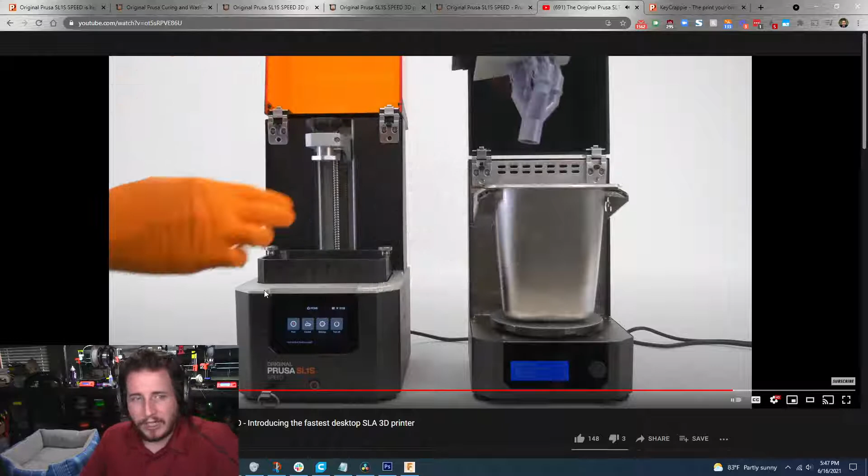And this, to me, is one of the other game changers: the CW1S, which cleans, cures, and even dries, and you'll see it also preheats the resin, which if you're working with tough resin or any resin that's very viscous, heating it is the way to get it to not be so viscous. And of course, they have an entire upgrade path, and that to me is a big deal.

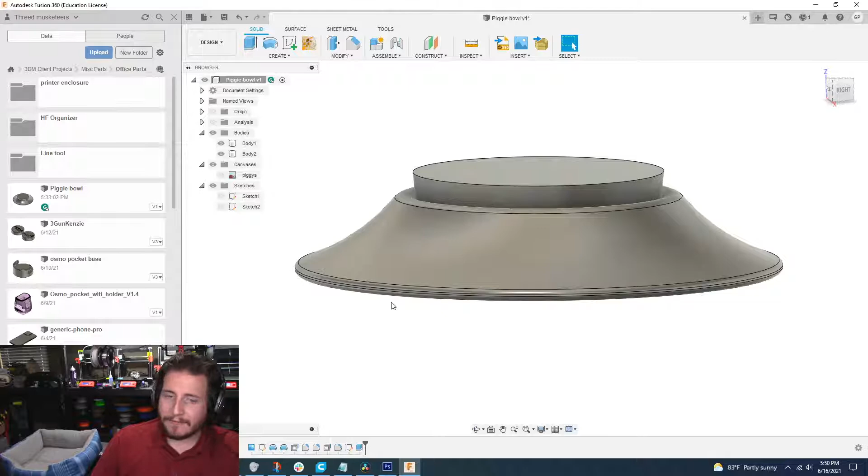Yeah, I don't know guys, what do you think? Could we have done anything different on this model? Let me know, this one went pretty quick though. I should have asked the individual for some more direction as to what they were expecting, but that's totally okay. Sometimes you win them, sometimes you lose. But yeah, I think this part came out really nice. Let me know what you guys think in the comments.

Are you going to get an SL1S? Man, I don't know, I want an SL1S, but God they're expensive. And they claim up to 3 times faster. But like, I can get 4 Elegoo Saturns for that price, and let's say only 3 of them work. A Saturn is much bigger than an SL1. The SL1S is 127 by 80 by 150, a Saturn is 192 by 120 by 200.

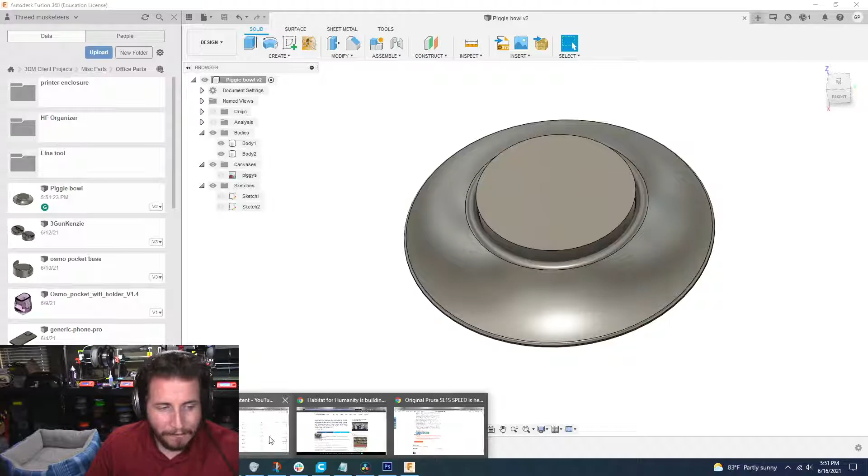I don't know, but I will tell you one thing about the SL1S - it is built like a freaking tank, and you are unlikely to have any of the problems that you have with some of these cheaper resin printers out there. I think that's really where Prusa goes, they go for user-friendliness. Are they the cheapest printers on the market? Hell no, you can get 4 Ender 3s for the same price as one Prusa Mark 3S. But are you going to have a better experience with the Mark 3S? Oh hell yes, you are.

And I like that that's where Prusa's positioned themselves, because they're not really competing with Formlabs. They're considerably more affordable than Formlabs, and their build volume's a lot smaller, but they're so much more expensive than like a Saturn or a Mono X or a Mono X Pro that's coming out from Anycubic. So I don't know, I think Prusa kind of carved out their own price point, where if you're a business owner and you want to print minis and you don't want any BS, and you have no experience with these machines, I think the SL1S CW1S combo is a freaking winner. I truly believe that is an A+, knock out of the park winner.

And I forgot, the cat went away. I didn't bring Greenfield back.

But yeah, that's really it for me guys. I know this was a really, really short live stream, way shorter than normal. But you know, we got done what we needed to get done really quickly. Sometimes parts don't have to be difficult, and my mind is on taking care of that customer and trying to solve their problem more than it is on this live stream. So forgive me, I'm not as entertaining as I normally am. And I am so hyped about the Prusa printer today, but my mind is really on taking care of our clients because ultimately that's what matters to me the most.